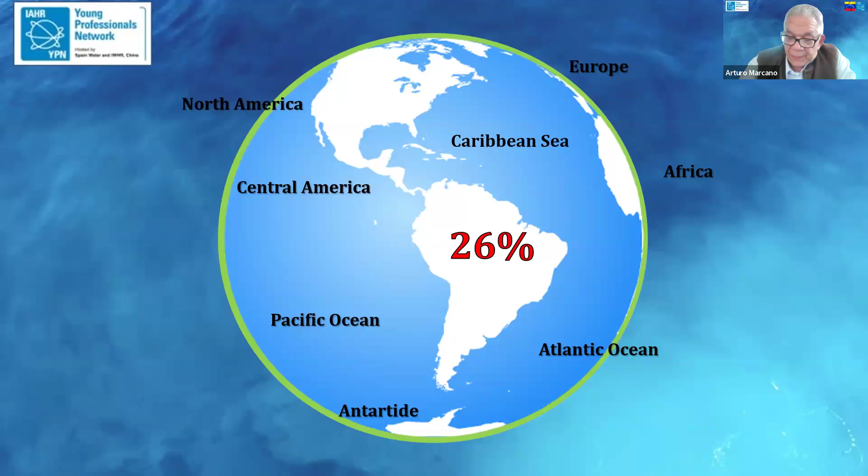So I'll start. This is mostly well known for most of you. We have 26% of the water of the whole planet concentrated in South America. This is a continent of water. It's water everywhere, although there are very few spaces where no rain at all falls. This is in the Andes, very close to Chile. Here we can see all these large rivers I have collected from some data. Many of you will be familiar with some of them because of your location.

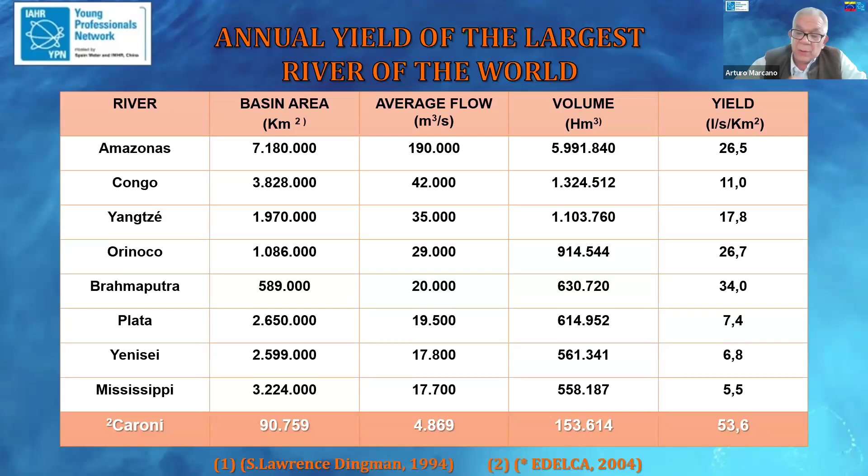We can see that, for instance, the Orinoco River is in Venezuela, and it's probably one of the best producers of water. I have included here the Caroni River, which is not in the same ranking as these large river basins, but you can see also a very large production of water from this river basin.

So why is Orinoco on display? Well, this is because it is controlling water in the downstream dam, at the end of the cascade. It is going to control water there. It's going to control the performance of the structure.

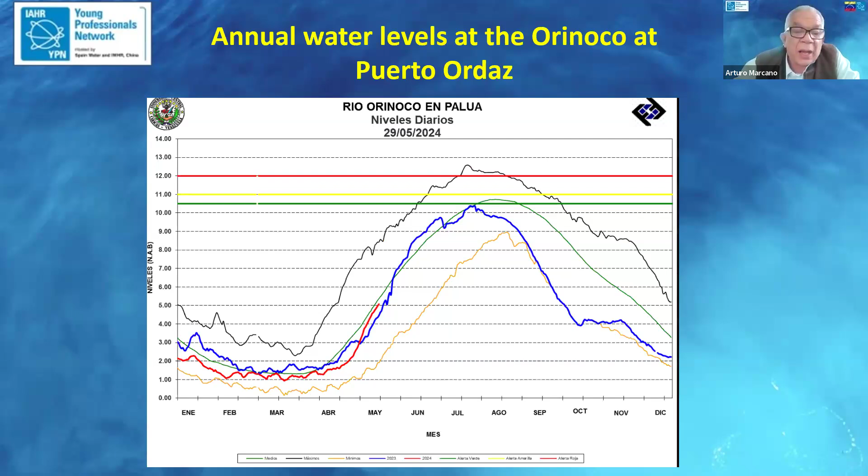So it's very important because downstream, at the very end, on the Orinoco, is the city of Ciudad Guayana. This is a city of 1 million inhabitants, with some of them at risk in the floodplain of the Orinoco and Caroni rivers. This is very short about hydropower in Venezuela.

We have only 9 hydropower stations. We have 5 in the Andean regions, and then we have 4 in the Caroni River, in the southeast of Venezuela. It's a small country, but it has a lot of hydro production. In this case, about 80% of the whole country's electricity depends on the Caroni River basin.

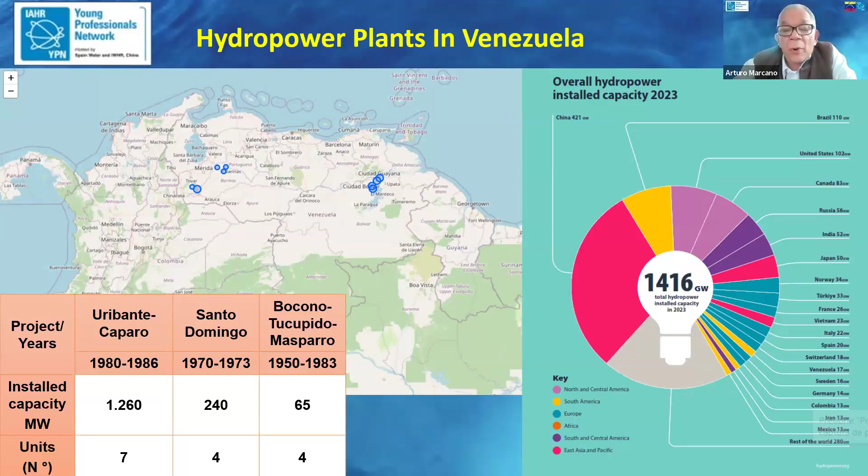We see the 4 in the upper Caroni for the future. Here is the cascade of the lower Caroni, starting with the regulation dam of Guri, 170 meters, and this is a very large volume. It's multi-annual regulation, and it finishes with Macagua. This is a small development, but still most of them are very productive in energy.

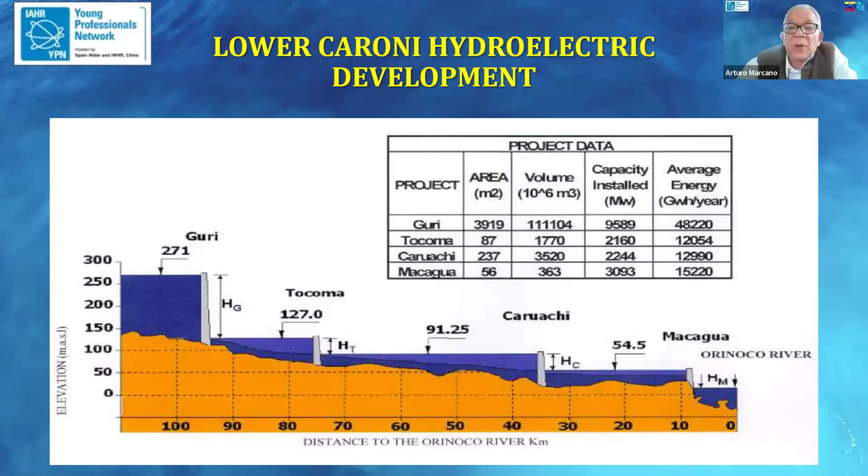Here we can visualize some of the challenges of building all these developments while the others are operating, and also having flood control in one or the other. So how to control the Orinoco River, not to affect flooding from releases from Macagua, etc. So we can start to visualize the challenges of this development.

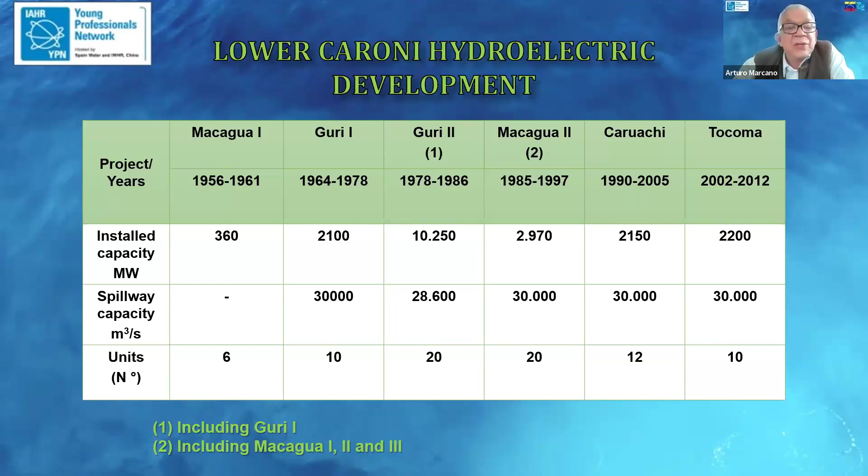So we start with the first project, that was Guri the first. These are the challenges for this. Well, flow is always a challenge: 40,000 cubic meters per second spillway design, diversion 17,000 cubic meters per second, the Caroni uncontrolled, a relatively small reservoir area, and, very interesting, we had unprecedented hydraulic conditions for a sluice closure. We had a sluice closure in most of these dams, so we're going to see that in some detail.

Handling a spillway flow with a very large flow capacity, talking about 40,000 cubic meters per second. This is about energy dissipation, and this had to be seen with a reduced capacity of regulation. Not only do we have these flows, but we have the spillway operating for 6 months, 8 months, a year, because the dam was not completed and the flow regulation was not 100%.

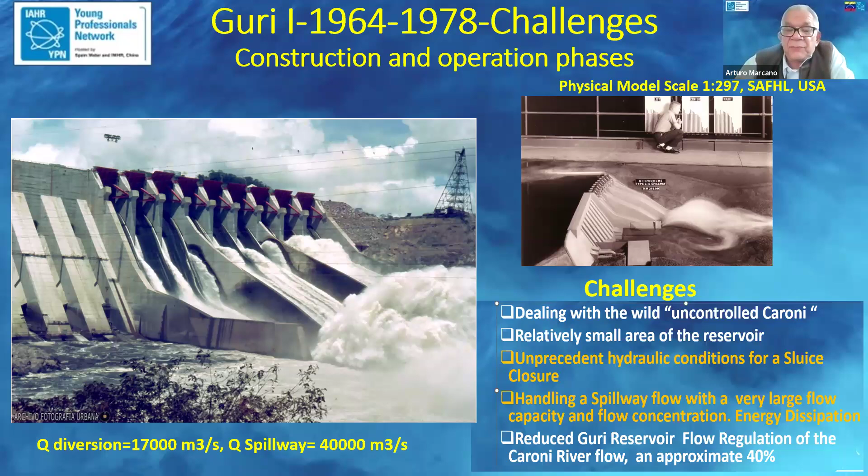Next project is Guri, the final stage. That means building one dam on top of the existing one from stage one. So the challenge is the second powerhouse; the tailrace channel is being excavated. And what is the meaning of raising the spillway and the existing dam by 55 meters? So in this, we incorporated all kinds of problems we had in Guri one. We tried to solve them and include them in the second stage. So we're going to see some of these challenges and how we solved them in a few minutes.

So we also had to guarantee operation of this dam while we started to build other developments downstream. To give you some degree of the challenge, we raised the spillway in different stages, and at the same time we had to keep enough capacity in the structure. So concrete was being poured on one side with gates, and the other part of the spillway was at another level with gates. So river floods would come and had to be released from the reservoir.

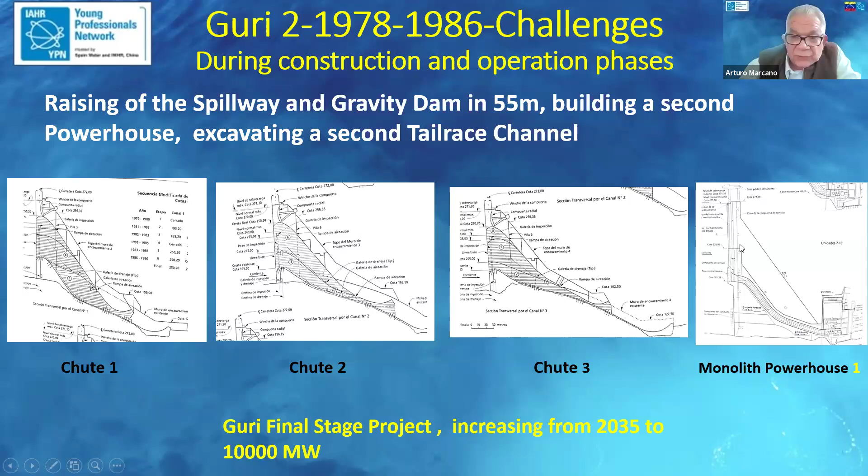Here you also see the dam being built up 55 meters. So we just passed that. This is how it looks now. It's something a friend of mine sent me. This is an advertisement from Water Power and Dam Construction. I don't know the date, but it has very interesting data. And it says at the end that Guri was for many years the largest hydropower station on the planet.

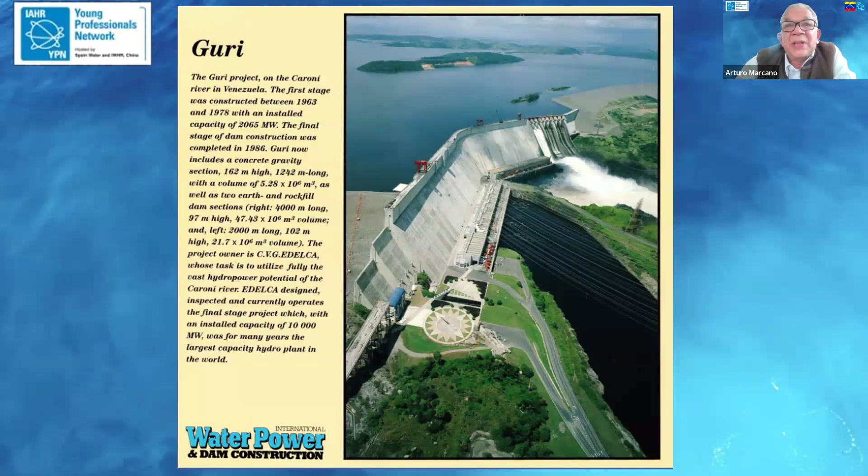So let's go to the second project. This is further downstream. It's called Macagua. Macagua is about 2,300 megawatts. One challenge is it's inside a city, so it's an urban project. And the other challenge is it's in a very touristic area where a very well-known park is. There are a lot of elements of ecology in this project.

Also, being the last project, very close to the Orinoco River, there was some risk and some challenges that may arise from controlling all the water outflow in Macagua. So, same thing, we have construction in one dam.

We have to close the full river, Caroni River, downstream, but we should keep Guri operating as it was for the energy supply of the country.

Next project is Caruachi. Caruachi is in the middle of the two. But what are the challenges? Well, at Caruachi we had to design a spillway, a very particular one, to improve diversion difficulty. So it was a very nice opportunity to test some breast spillways, surface spillway. So we finished up with the spillway work. I'll relate some studies in a few minutes.

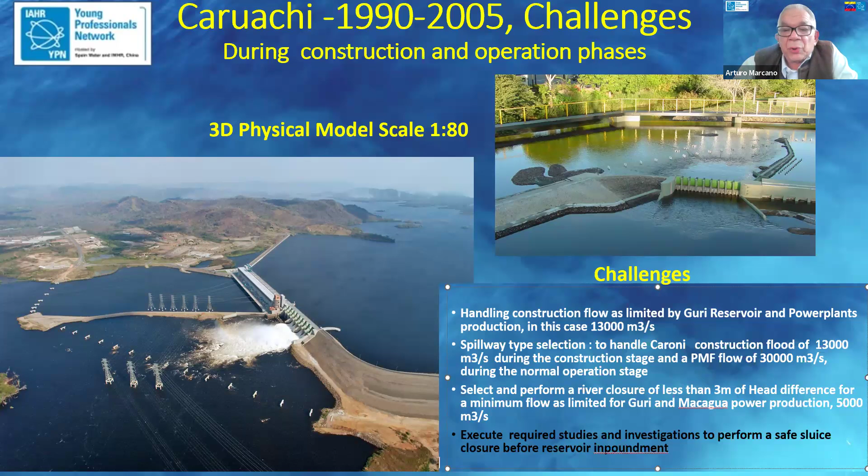So again, we had to have also a river closure in the sluices, with not much difficulty. So again, Caruachi is in the middle of the two projects. So handling flow from Guri and retaining in Caruachi, releasing in Caruachi or to Macagua, which also may impact the production. So these are the challenges.

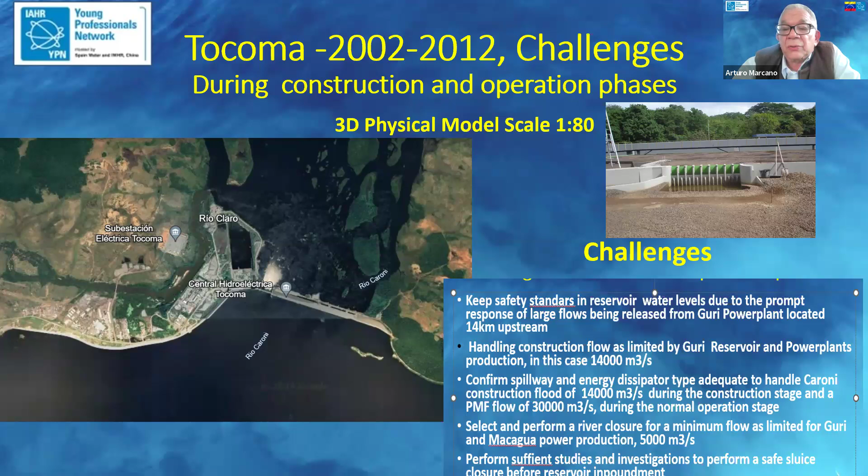Finally, this is the closest to Guri. It's very close. Actually, you step on Guri Dam and you see the other dam is only 14 kilometers downstream. And challenges are related to safety. Of course, when opening the gates at Guri, gates in Tocoma project should be also open, etc. So again, we have to confirm all studies, investigation for sluice closure, and also how to deal with the 14,000 cubic meters per second construction flood.

So this company, EDELCA, who was in charge of this development, also had a program, a master plan, and decided to have its own laboratory to participate in all this study. So we had our first test in 1977. I had the opportunity to participate as a very young engineer, just graduated from university. I started that experience, and that continued. And the laboratory, although it's somehow inactive now, went on for more than 35 years.

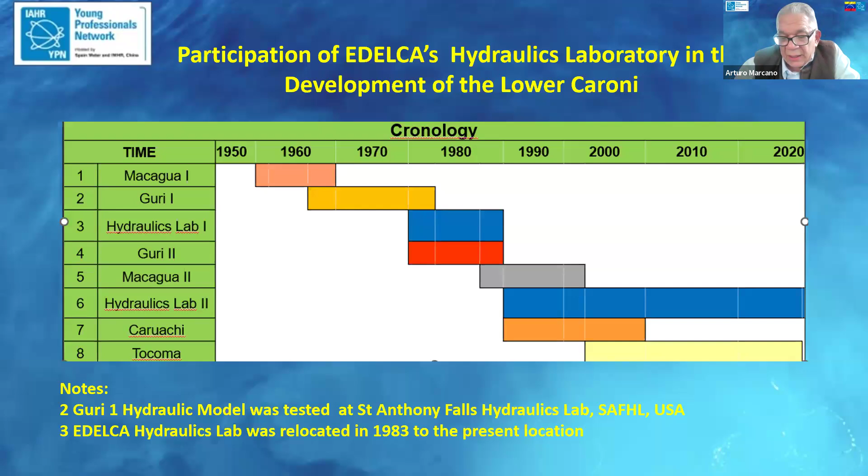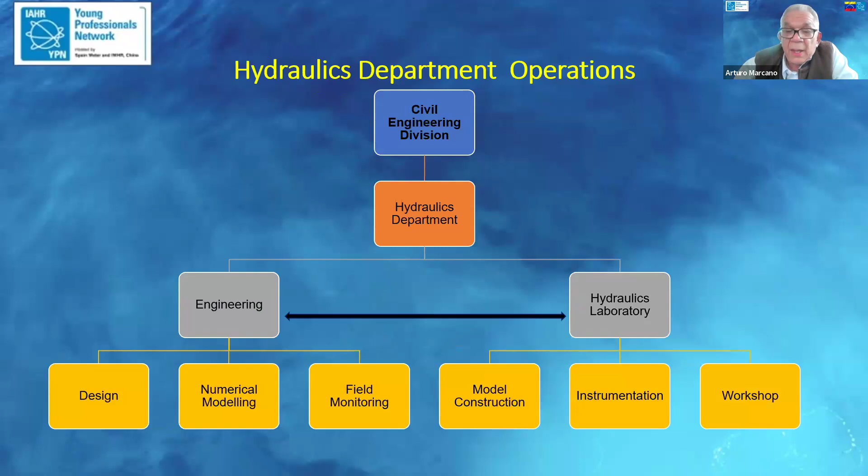So I had the opportunity to test, study and design most of the hydraulic structures related to this project. This is the strategic location of the hydraulics department where the laboratory was. This is more or less how the hydraulics engineering department worked, with the design, the numerical modeling, the field monitoring, model construction, instrumentation, and at the end, the workshop.

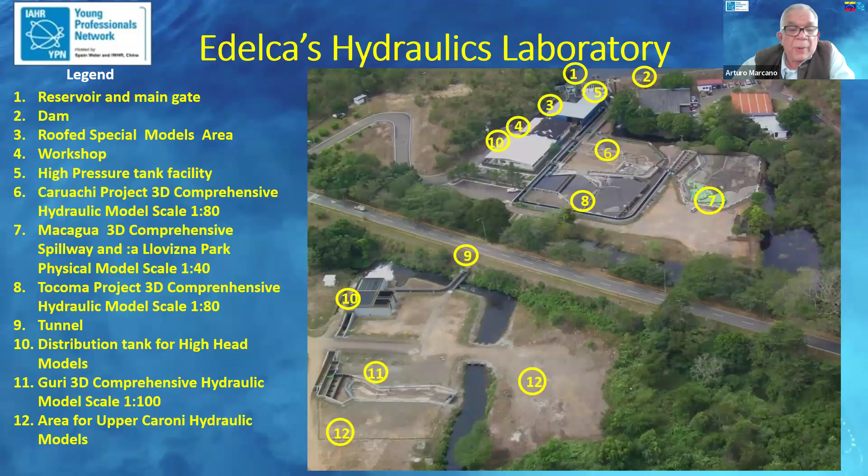So this is the first site of our laboratory. We see the large models. All the models of the development were there. Most of these large models are over 1,000 square meters. We have a facility to test tunnels. We have, of course, a workshop and instrumentation room, and some area for expansion for future projects.

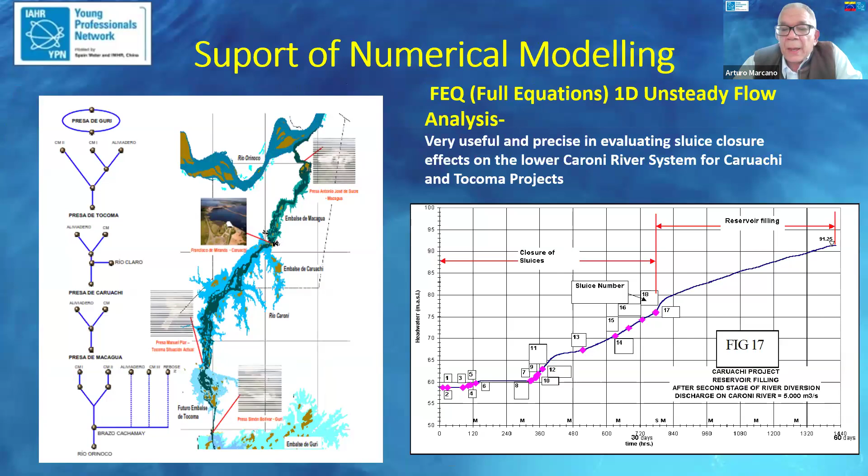So talking about numerical support, we use very well-known and common software like HEC-RAS. We managed to measure in a whole 100 kilometer reach a lot of flows and water levels and so on. So we could see that this model worked perfectly, and our forecasts ran very well. We also use unsteady flow, particularly for some situations. For instance, in the Caroni, we have all this sluice closure, and that model performed very well.

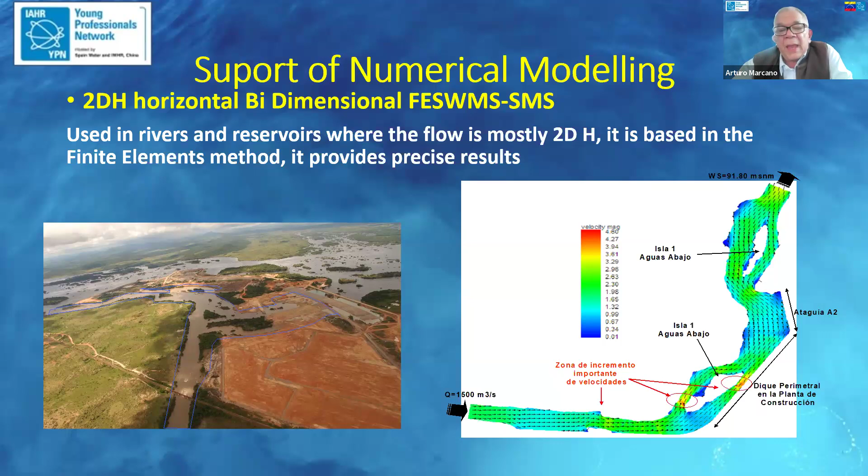Also, dam break we use to do inundation maps. We have this 2D horizontal SMS flow. It is very nice also. In our laboratory, we have the opportunity of mixing them and checking one with the other. So that's the kind of thing you can do when you own your own laboratory and your own people to design a project. We were a team that stayed there for many years. So all these models, although they may look very simple, were very useful.

This is another model we used one time. We were dealing with aeration at Guri with this model, since a finite element model was perfect for the job we were doing at the moment. And we managed to combine this with the prototype and physical model data to obtain our best results.

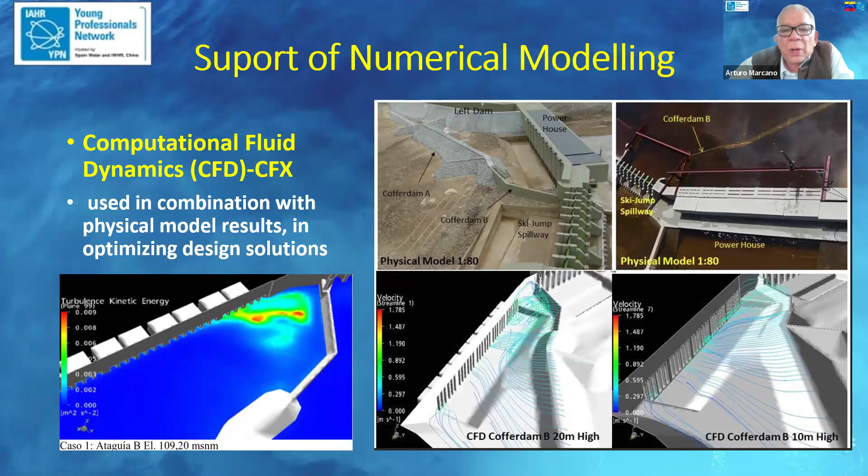Then also CFD, which is very common now. Those were studies of 10 to 20 years ago. But it's very interesting. We mixed numerical with the physical 3D model. So it was a very nice combination to optimize your project. Here's a presentation of what kind of models we used for Caruachi. We have all sorts of models we can use to solve the different problems we had on that project.

Let's talk about some incidents. The sluice closure. This is Guri. That happened many years ago, but it was a very well-known case. We had gates get stuck and the river could not be stopped passing through 14 sluices.

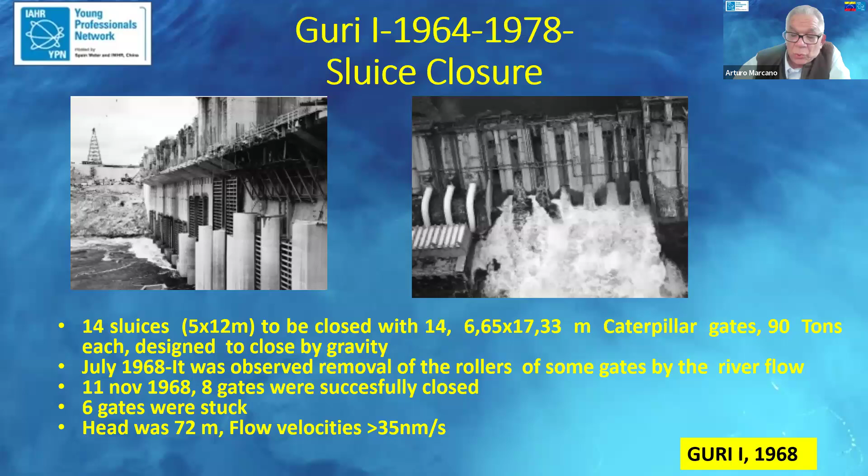It was designed for 17,000 cubic meters per second. So what happened there? They didn't test gates. They didn't do it; they thought they didn't need to do it. The design was not very friendly either to close with some additional things. There was no second slot. That means no emergency closure.

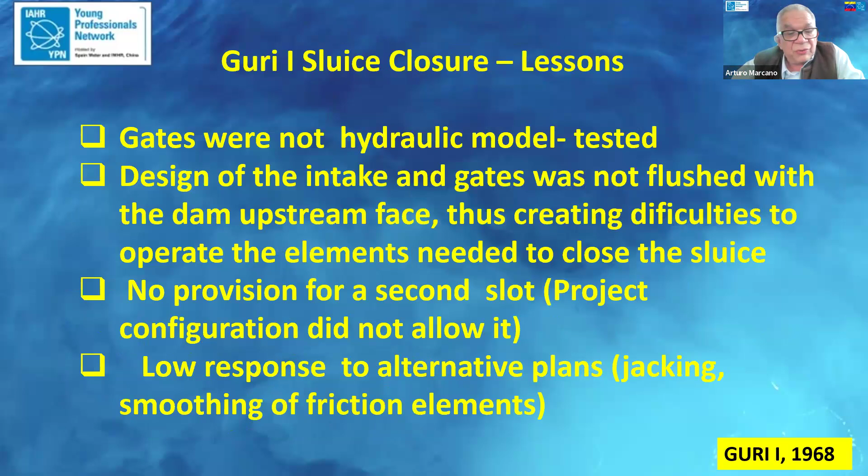This is what I'll mention to you later. It's very interesting. Then they did many things, but none of them worked. So they finished up with this kind of arrangement. They were dropping heavy things until those were placed in front of the sluices. They were closing one by one. And it was a nasty situation. It lasted for some time, but they managed to finish.

Somehow that lesson was in our minds, although we were not at that time in the place. Let's see how we saw this in Caruachi. So in Caruachi, we had the laboratory. We have people there, we have engineers. We could analyze first the kind of spillway. We needed to have 13,000 cubic meters per second diversion and 30,000 cubic meters per second as a service spillway. So we managed to finish with this structure, which has been built now and is operating.

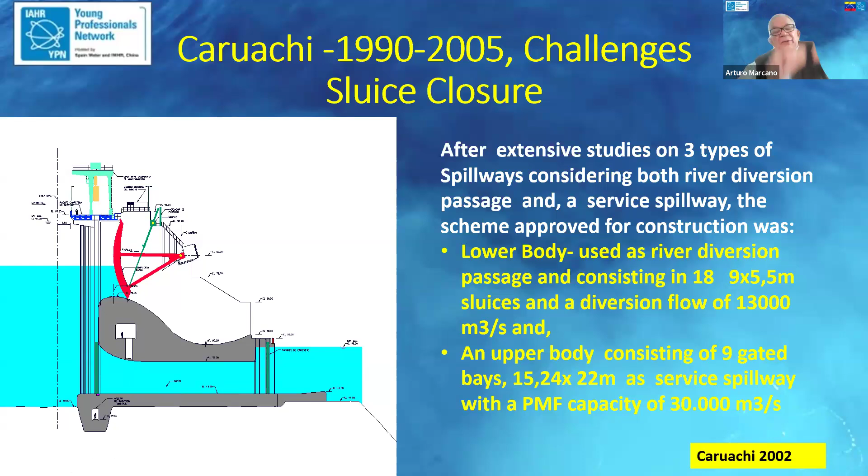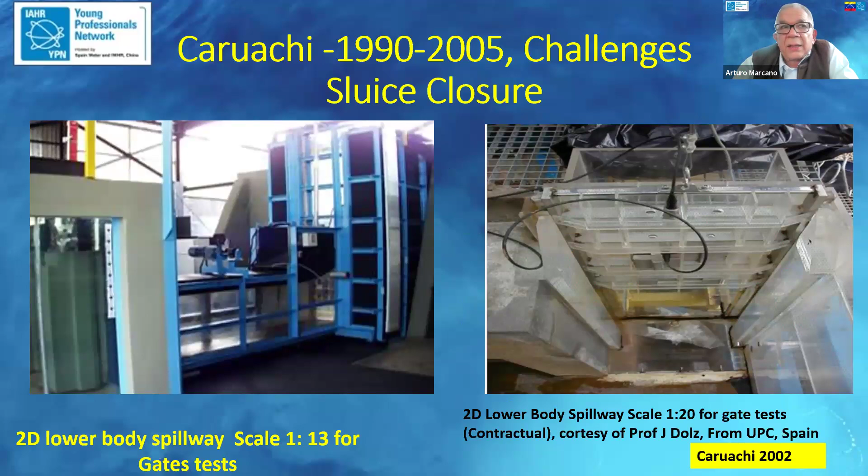We had two slots. We have the possibility to have a service closure downstream, and we have the possibility to have an emergency closure. So it was 18 sluices, 9 times 5.5 meters. But we implemented some modeling of gates. We had our own model, and the contractor contractually had the obligation of doing another model.

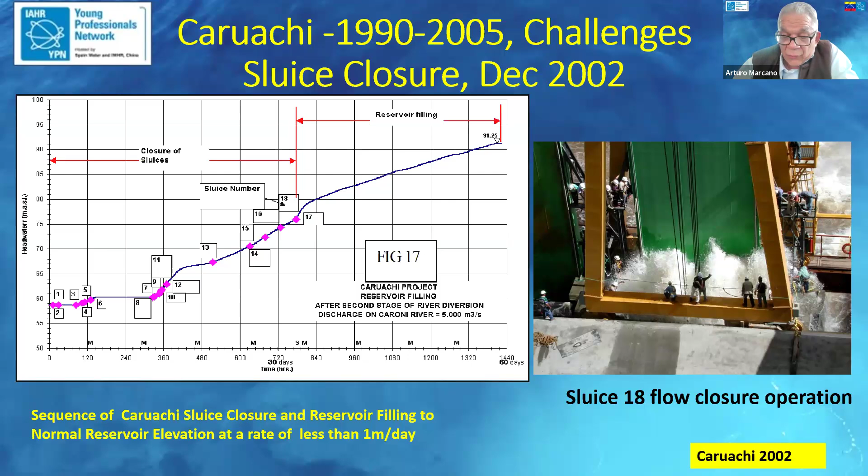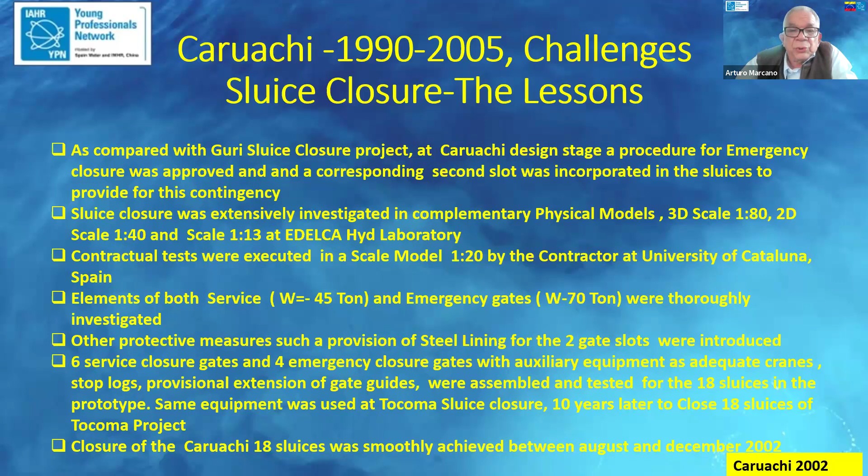Then the lessons. We learned that investigation should be done, that provision should be taken for a second slot when you have this kind of situation at the river, other protective measures or provisions, steel lining, etc. So we feel that was also a very good idea. We had the laboratory, we had the people there, we had the intention of not repeating the same failure. And actually, we used the same equipment to close, 10 years after, the sluices of the Tocoma project with no problem at all.

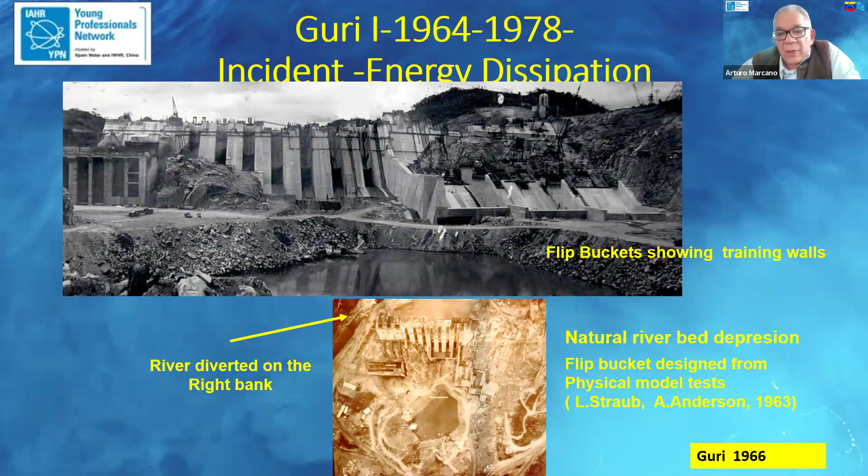So we go to another incident. It's also Guri. Everything comes from Guri. It was so monumental, such daring work. It was a time when things had to be done that way. So we have these flip buckets there, and we have the sluices. So we started having this kind of behavior of the flip buckets. They behaved terribly badly. We had a lot of problems repairing them with this floating gate. You can imagine all kinds of problems, because the flood had to be released through the next gates while you were doing the protection.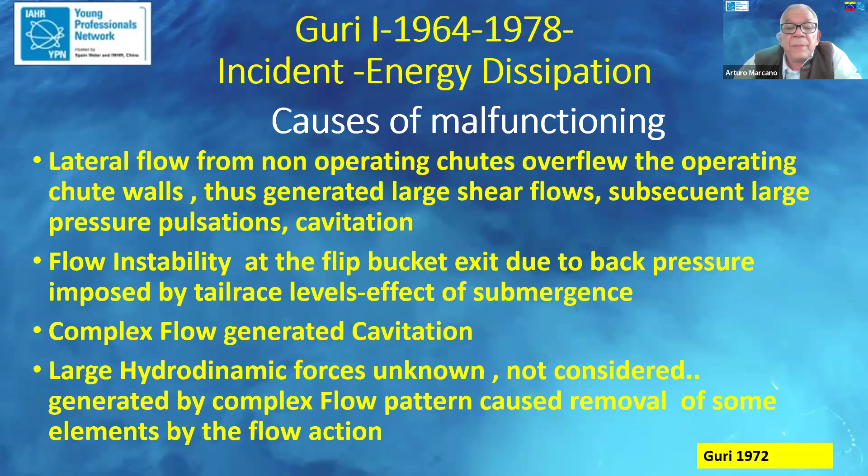So what was the cause of this? We have very large structures working with submergence, a very complex flow in this interface of submergence and flipping. That was investigated in the large model in the San Antonio Falls Hydraulic Laboratory. And a decision was then taken by the company to raise this flip bucket. So we went again to physical modeling, and we finished up raising these three buckets. We did quite a lot of tests. It was one of my tasks; we tested so many flip buckets, and we finished up with a range that was pretty good.

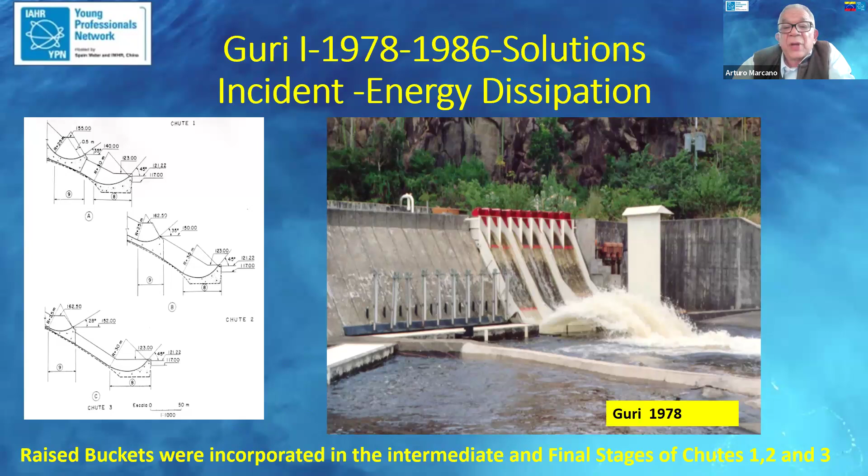So the lessons, I mentioned some of them. These are very large prototypes. We don't know much about how they're going to perform, and we should take the risk. And eventually, if we had a chance to improve, repair, or do rehabilitation as we did, that was something very important to consider.

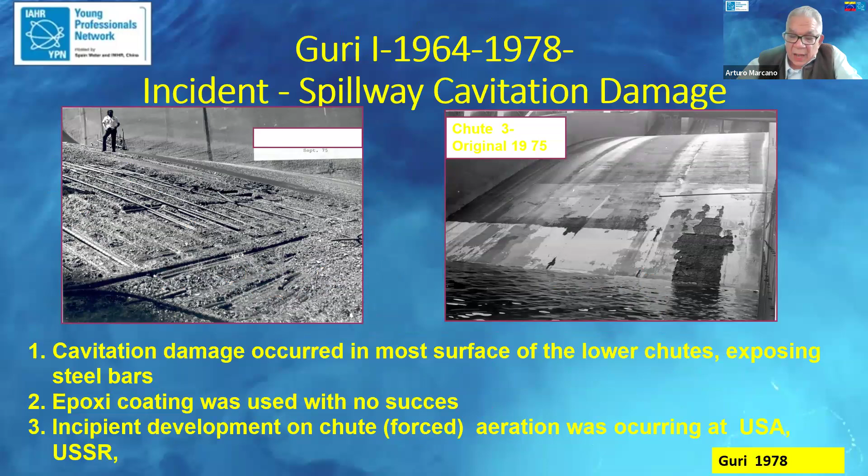The second incident is about cavitation. It also comes from Guri. And we have many other lessons, other cases in other projects, but I think these are very prominent. There was a lot of cavitation in the first structure. At that time, in many large surface spillways, the technique of aeration was being introduced. So what did we do in Guri?

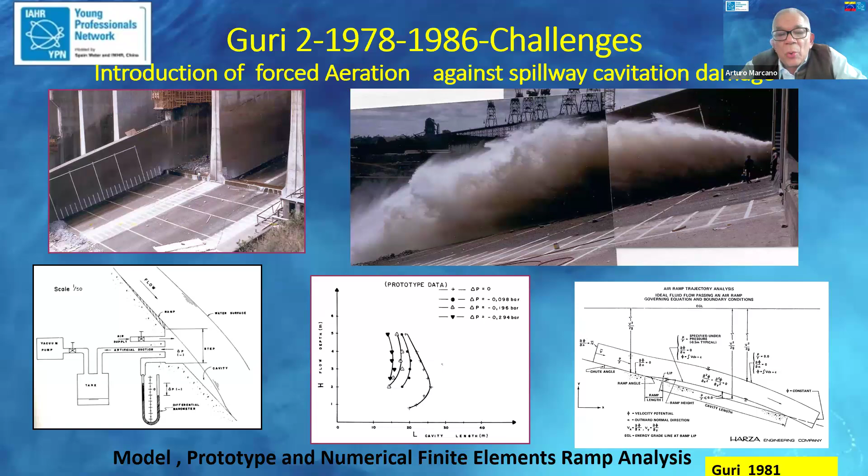We started to test how these devices will perform. We had the prototype, then we have a large physical model. We count also with numerical tools. So we started to do testing in the prototype measurements, and we finished with this kind of arrangement, which is very unique and strange. It can be used, of course, in other projects, but it's an aeration system that you build when you have a project already built, say, put it in that way.

So the best possibility was to adapt a system of air galleries, as you see there, with some intake somewhere close, and then a manifold of air. So we had the chance of measuring all that. We measured negative pressure, we measured flow, velocity, and we managed to develop a method. So at the end, we finished with a couple of aerators in each chute, we have a gallery in the downstream aerator, and we have a ramp at the end of the pier. So they will perform very well.

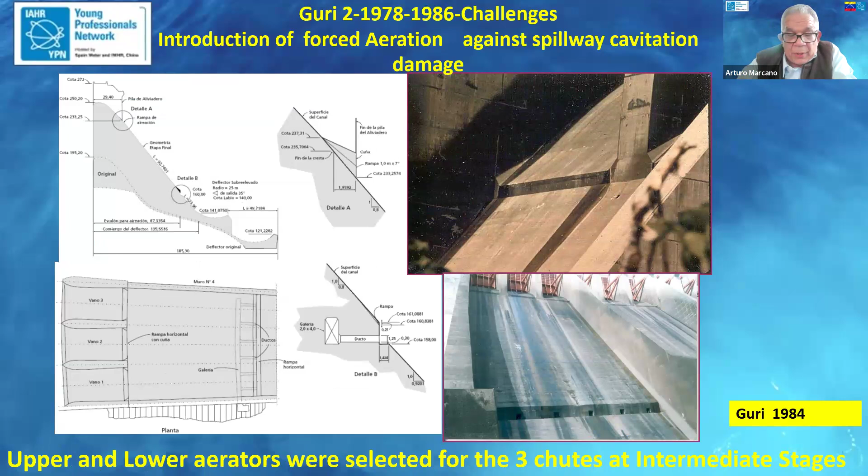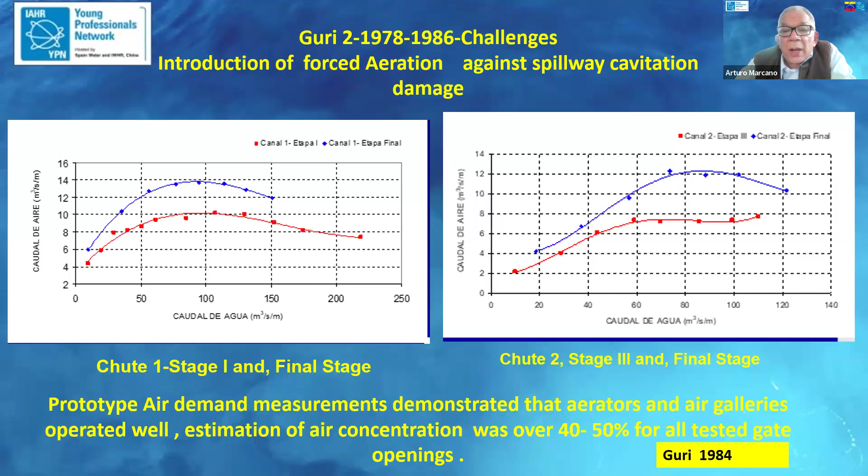For instance, these 2 graphics come from prototype measurements, and from that we can estimate air concentration of about 50%, which is what we asked in the design to protect the spillway surface. So I think we're running out of time, so I have more topics, but I will finish my talk with some final remarks.

There is some confidence created by having this laboratory performing, well equipped, and very motivated with this project. The laboratory actually was next to the works. We could go to any of these works in less than 1 hour. We could move there and see the structure performing. We could go for meetings there. We could inspect the job done by contractors. So in that environment of total control of what was going on, we were always also part of the design team, as I mentioned earlier. So this is a key for success.

I think we didn't lose respect for such a large river. We had a lot of surprises from it, but we were capable of handling them, of facing them, always with the help of our mentors, of more experienced engineers, more experienced experts that were always around us. So I think that's my last word.

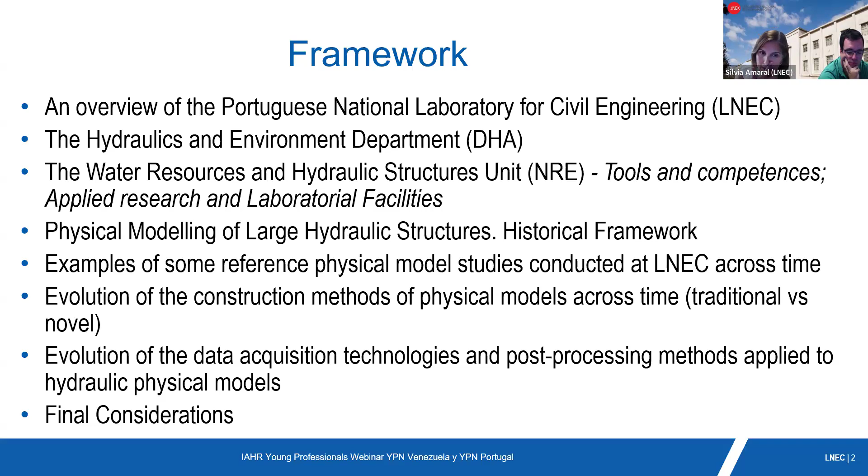So then I will offer a historical framework or background of what is and what has been the physical modeling of hydraulic structures, as well as some examples of reference studies performed here at LNEC across time. Also, a view on the evolution, not only in the construction methods, but also in what concerns the data acquisition technologies, as well as the novel post-processing methods that are currently being applied, will be presented, as well as some final considerations at the end.

So, for a start, LNEC, the National Laboratory for Civil Engineering, is a state laboratory that dates from 1946, meaning that it has almost 80 years. It actually started with the hydraulics department, with the physical modeling subject. It operates in several fields of activity, its main fields being the civil engineering works directly applied to public works, since it is a state laboratory, housing and urban planning, also the environmental concerns, the building industry, and last, the components and other construction products.

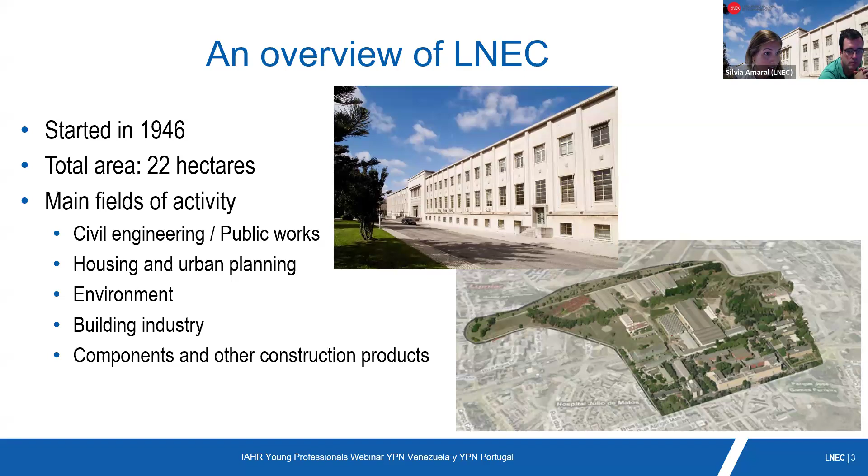So our department, the Hydraulics and Environment Department, has a wide scope. We are only a unit of this department, but in general we can say we are divided in these 5 areas: the urban waters, more currently called sanitary engineering, the estuary and coastal zones, the harbors and maritime structures, the water resources and hydraulic structures, and the groundwater. These physical model studies applied to hydraulic structures are performed mainly in the water resources and hydraulic structures unit.

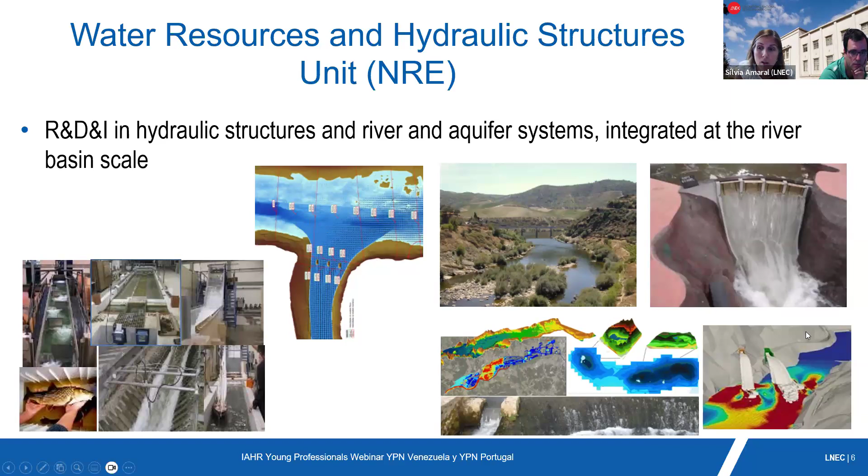This unit is where António and I are from, and we perform many types of studies, among which research and development studies, applied investigation studies, but also consultative projects that are meant to give direct answers to specific projects, mainly in hydraulic structures, in rivers, aquifer systems, all integrated at the river basin scale. So here in this slide, some examples of our facilities, of our flood studies, of our physical models, as well as of our numerical simulations.

So, in terms of our competencies or our tools, we act at 4 different fronts: a laboratory front, a field front, a computational front, and a decision support front. So in what concerns the laboratory front, we have our scale models, which are mostly physical models that can be divided in 2 different activities. Physical models applied to give answers to certain specific projects, mainly ones being constructed or that have to be improved, for example, power plants that are performing some power reinforcement. This is just an example.

And also the specific investigation studies that most of the time give origin to PhD studies, or lines of research that we have open and that are of absolute interest here at LNEC. Then we have the field monitoring. It is composed of field campaigns and sensor installation at the prototype scale that are monitored, and where we gather data sometimes to compare to our physical model data, but not only.

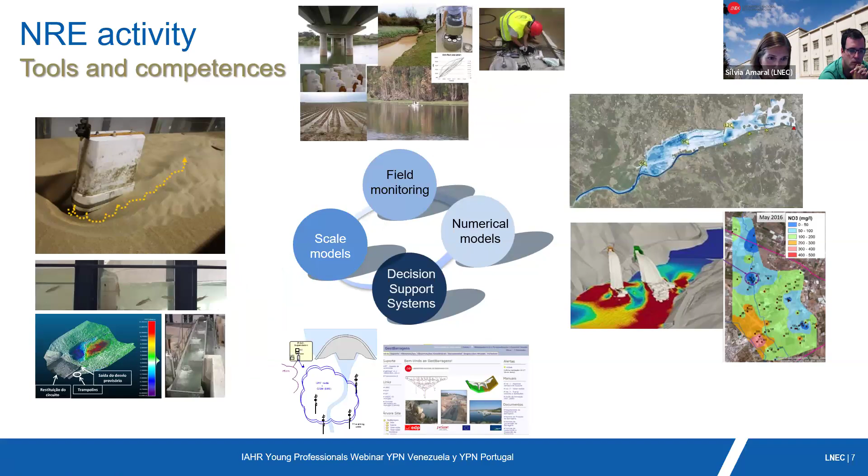Then we have these decision support systems, which are mostly platforms that were created where we give information to support the decisions. So, some examples of our facilities and of the flood propagation studies.

So regarding the NRE as a whole, I can state that currently the advances we have nowadays in what concerns the construction of scale models, namely by using these novel approaches of 3D printing, the control of equipment automatically by computing, even the new materials that we are able to use, combined with the integrated modeling of complex geometries of hydraulic structures, not only with physical modeling, but also with CFD simulations, allow us to affirm that we are currently at a stage of strong improvement on the characterization of flow behavior around hydraulic structures.

That is to say, not only, but also spillways, hydraulic circuits, and other specific hydraulic structures. I think I should make a remark here that we mostly refer to the spillways and hydraulic circuits because plenty of our consultancy work is concerned with dams, with the hydroelectric power plants that are already built and being improved, or that are about to be built. That's why this is a huge part of our work here at NRE. So I can say that NRE, from this point of view, performs an important activity at the national and

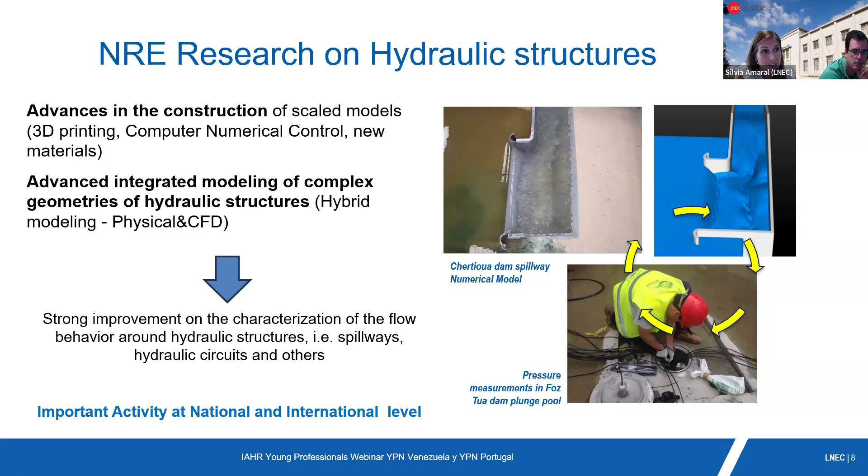international level. So you have here the example of a physical model, on the right side, a numerical model, and below you have also the sensorization, the sensors installation at a prototype scale. Of course, this is not always possible, but in some models that we have accompanied from the start, during the construction of the dam that follows the physical model and the numerical model, we were able to install some sensors in order to compare with our results.

So in terms of lab facilities, there are plenty here, not only in NRE, but in DHA, in the hydraulics department as a whole. We have a 5,000 square meters indoor area with a pumping capacity of 500 liters per second. So we count with an artificial aquifer where we are able to perform pollutant tests for groundwaters, with a channel that allows us to perform reservoir sedimentation by studying the turbidity currents, a facility where we study the jets impacts on a plate or a stilling basin, which is actually the field of the PhD of Antonio, which is about to finish.

We have also a non-conventional spillways facility where we study precisely the aeration issues, stilling basins. We also perform at a scale of embankments, like the failure of embankments, in this case river dikes or even embankment dams, fish ladders, flumes with variable inclinations, where we are able to study the scouring around bridge piers, steep spillways where the aeration is also an issue, water quality and soil laboratories, as well as the study of floods in compound channels. Of course, these are not all our facilities, but it gives a good idea of the kind of works we perform here in terms of physical modeling.

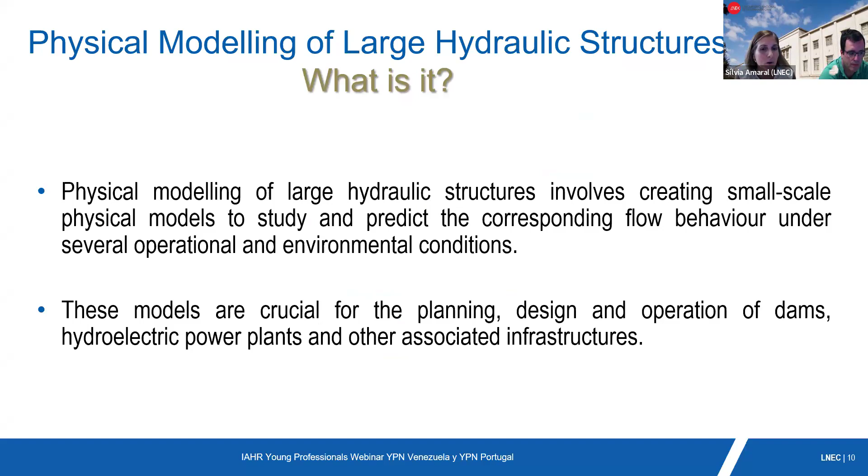So, generally speaking, what is this physical modeling? This involves creating small-scale physical models to study and predict the corresponding flow behavior under several operational and environmental conditions. And of course, these physical models are absolutely crucial for the planning, design, and operation of dams, in our case, which is most of our work, hydroelectric power plants, and also associated infrastructures. From the role of these studies point of view, we can say that physical modeling is very, very important for the design and planning of a project.

I mean, the validation and optimization of the design of the dam that was initially thought and dimensioned based on the theory. It is also essential for the hydraulic analysis in terms of how the flow behaves near the hydraulic structures. Also fundamental for the safety and reliability of the project, since the physical modeling allows to identify potential structural or functional failures, and also to perform the studies of erosion downstream of dams in rivers. It also allows for mitigating the environmental impacts, as it aids in identifying any negative environmental impacts.

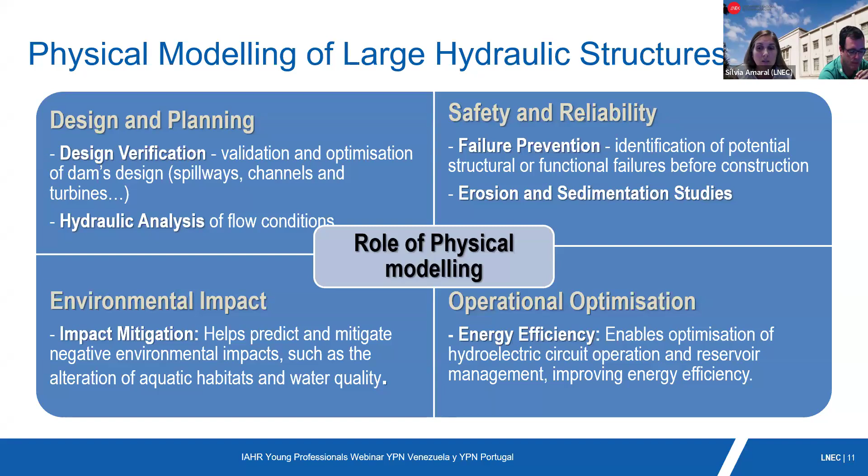This is particularly true when we talk about fish ladders, for instance, where we can try to understand which alteration will be implemented on the aquatic habitats and water quality. As a whole, we can say that the physical model acts as a whole operational optimization, since it enables to optimize the hydraulic circuits as a whole and the reservoir management. So, just some final remarks before I pass the word to Antonio.

I should say that at the beginning of the 20th century, the first physical models or the first studies on these hydraulic structures were mostly based on empirical models, and the reduced scale models that existed, if they existed, were very, very simple, made with very simple materials such as wood and concrete. Later developments, between the 50s and the 70s, some novel technologies started to appear and they started to build models with a higher precision.

These were the decades where the first computing methods started to appear and to give a little help on these studies. But it was only between the 80s and 2000, in what we call the digital age, that some strong improvements started to be seen through the use of computational modeling, starting to give a bit of help to define the physical models. And we started to use some more sophisticated instrumentation, not so sophisticated nowadays, but at that time it was really different.

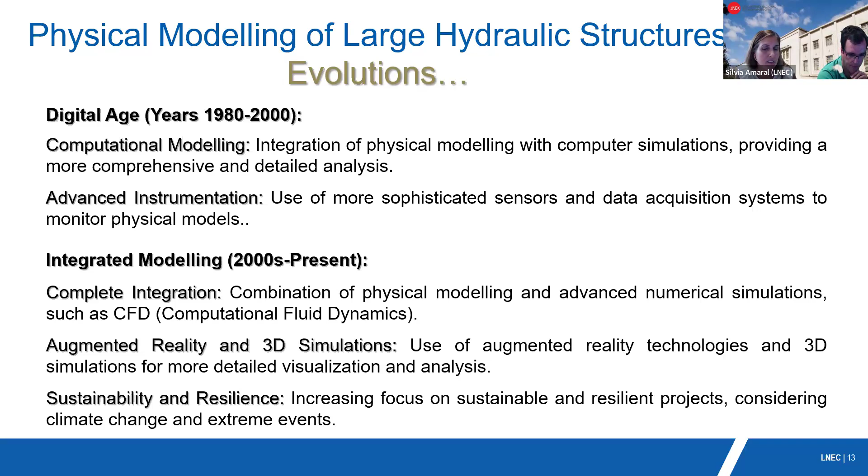And after 2000 up to the present, we are in a scenario of complete integration of the physical modeling with the numerical simulations, most of the time by using computational fluid dynamics, the CFD, also using augmented reality and 3D simulation. Besides this, there has been a strong increase in the focus of these physical models, not only on improving the forms and the design of the structures, but also on creating projects that are sustainable and resilient from the environmental impact point of view, and by adding climate change and extreme events in the simulation.

So now I will pass the word to Antonio.

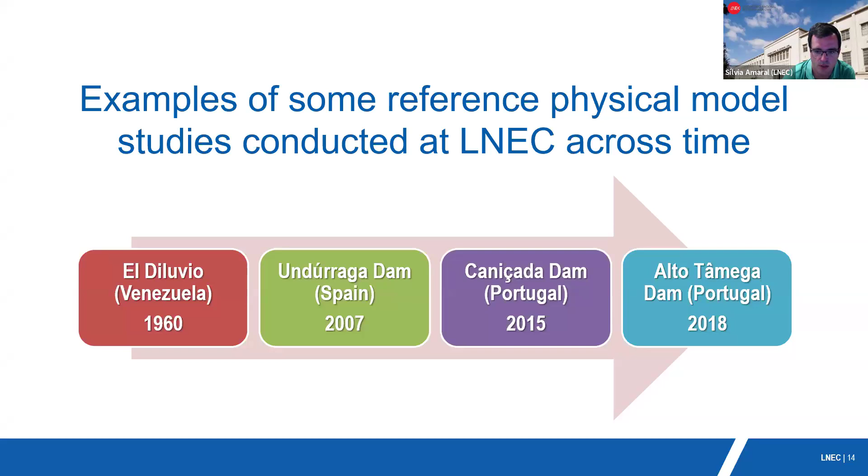Thank you. Now I will present 4 different examples we have here at LNEC, 4 different physical models we built from the past to more or less nowadays. First, only for indication, and because it is from Venezuela, we built in the 60s a physical model of the spillway of El Diluvio Dam in Venezuela. We built 2 physical models, one 2D model of the spillway on a scale of 1 to 100, and the other a normal 3D model on a scale of 1 to 50, with huge dimensions compared to the 2D model.

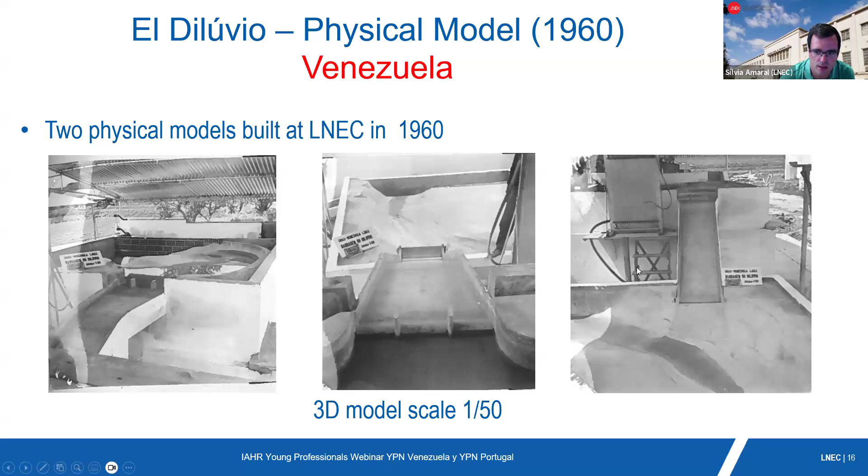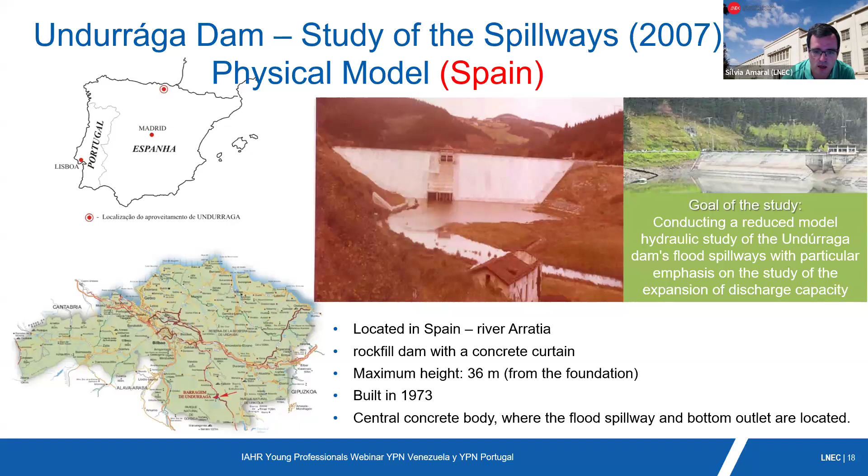Passing to more recent models, here is one from Spain, Undurraga Dam in the north of Spain, and the main objective of the study was to study how it would be possible to increase the capacity of the spillway. Undurraga Dam has one existing spillway at the top of the dam, the main spillway, and another one was projected, the auxiliary spillway. This one is the main objective of this study.

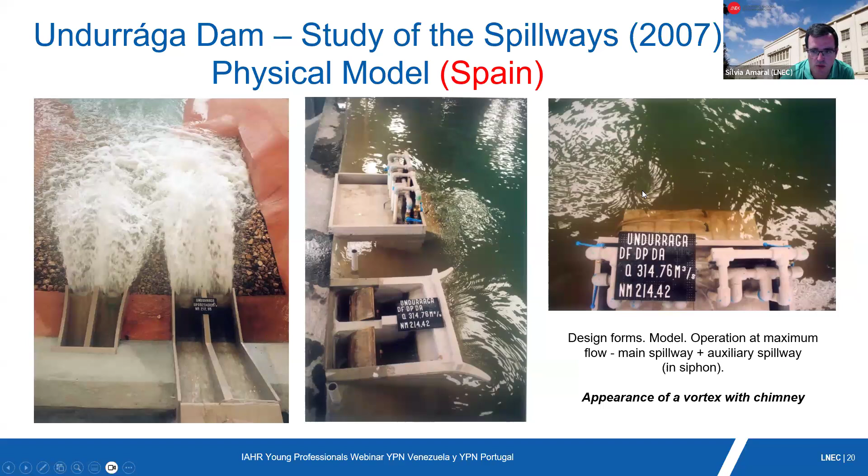We built a 3D physical model, and in these photos it is possible to see a downstream view of the jets created by each of the 2 spillways, with 2 spans each, and the inlet structures of the spillways. In this case, we found some problems, shown in the figure on the right. We found vertical vortices in the inlet structure, causing some problems because the flow inside this spillway is a pressurized flow by a siphon.

And we made some changes in our physical models with the main objective of eliminating these types of structures. We built several alternative solutions in wood at this time, forming a grid, and we found very good results in the flow conditions after the tests. We proposed to our clients some changes in the initial design in order to eliminate the vortex that occurs in the physical models.

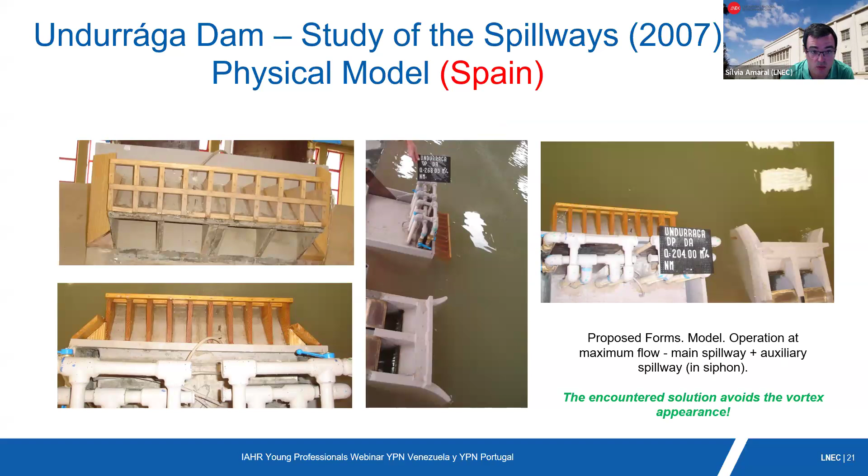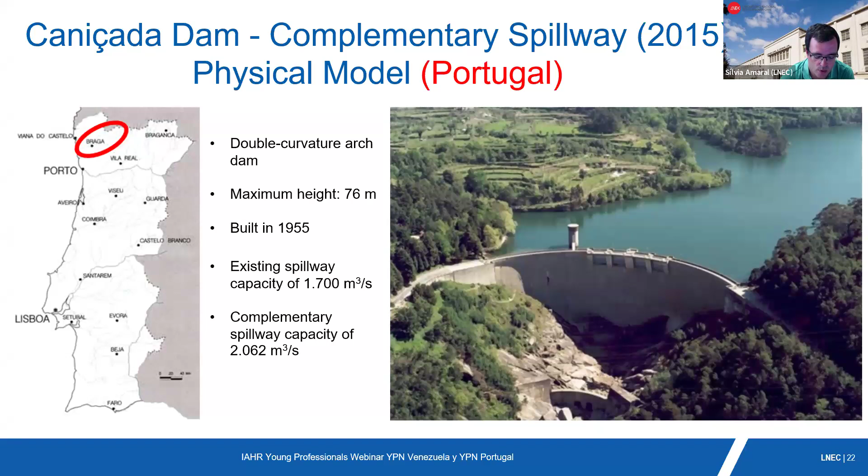Passing to Portugal, Caniçada Dam is a dam built in the 50s in the north of Portugal, with an existing spillway at the top, with a maximum capacity of 1,700 cubic meters per second. Due to the new regulations and the revised climate data, a new complementary spillway was built with almost the same capacity as the existing one.

We built a physical model here comprising the existing spillway, the complementary spillway, the upstream reservoir, and the downstream stretch of the river. I will focus only on the ski jump structures of this complementary spillway. We studied the design shapes, and we found a very compact jet in the figure on the left, which would cause some erosion at the river bank. We studied 8 types of alternatives, like the figure on the right side, with wood simulating different configurations at this time. Nowadays, we don't use wood very often to do things like that.

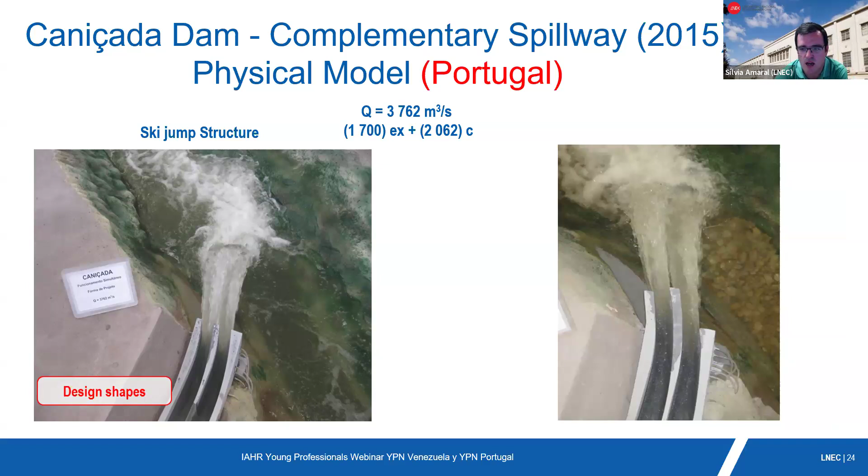After those 8 iterations, we found with our clients a good agreement on the solution for the ski jump structure, and we found less erosion, more dispersed jets in the air, more dissipation of energy in the air and through the atmosphere, and it is better for our clients.

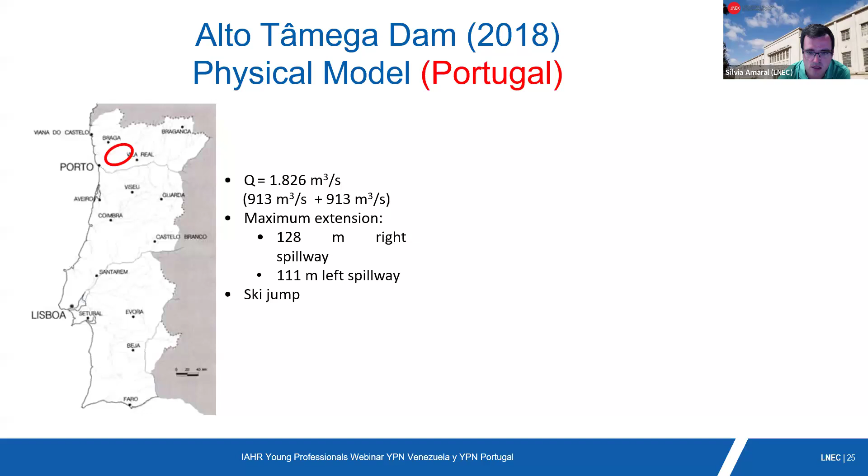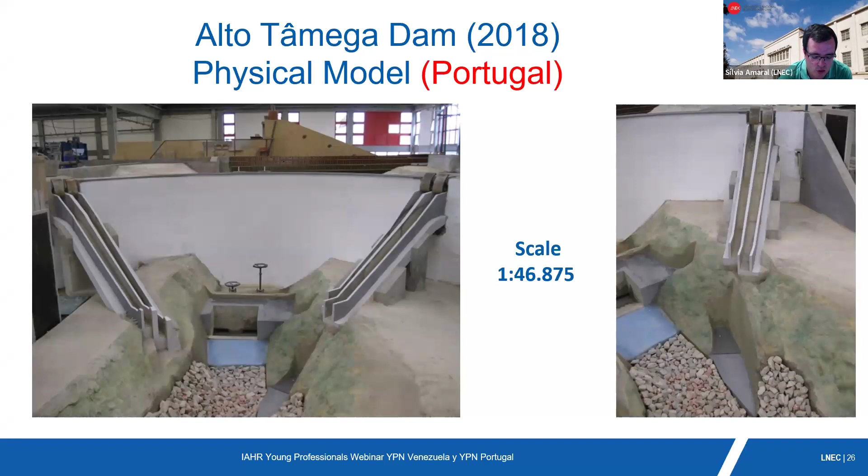Now, Alto Tâmega Dam is, let's say, the last dam we built here in Portugal; it was finished this winter, and it is also in the north part of Portugal. It has 2 spillways, one on each bank of the river, and we built the model at a scale of 1:46. The dam also has a power plant at the bottom of the dam, and likewise we built some part of the reservoir and the river downstream of the spillways in this case.

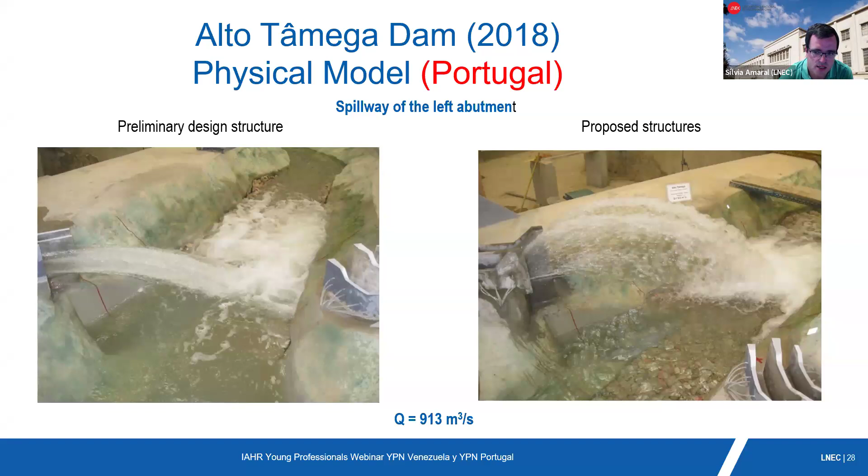For the other spillway, the spillway over the left abutment of the dam, it is more or less the same procedure. We studied the ski jump in the preliminary design shapes. It is a very compact jet impinging at the bottom of the bank of the right spillway, which can cause problems due to scour in these hydraulic structures, and we made some changes, and the proposed structures reveal a more dissipated jet in the air, impinging more at the river center line, and creating less erosion.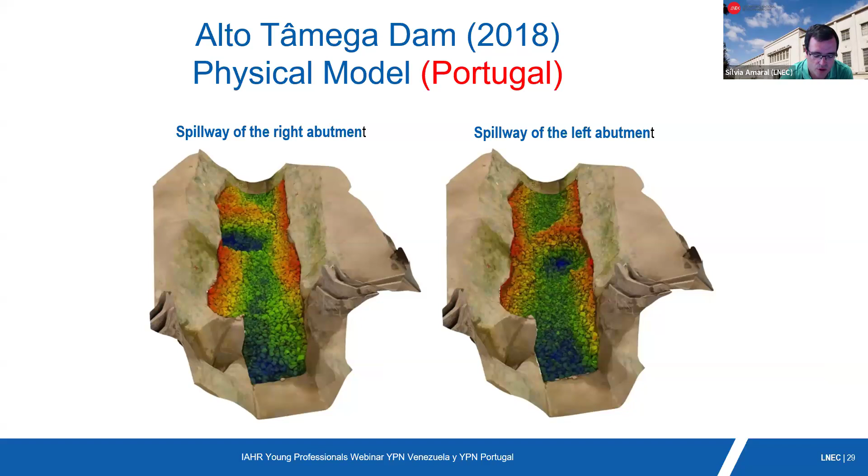In this model, we use photogrammetry to characterize the scour of the jets of the spillways at the bottom of the river. Here are the results of the operation separately from both spillways.

Now we are trying to use novel constructive methods like 3D printing. Here it is possible to see in the left figure one of the spillways of Alto Tâmega Dam, when we started to introduce 3D pieces to modify the ski jump structure, and in the right figure, a 3D piece of an experimental test of a dam failure in one of the flumes we have.

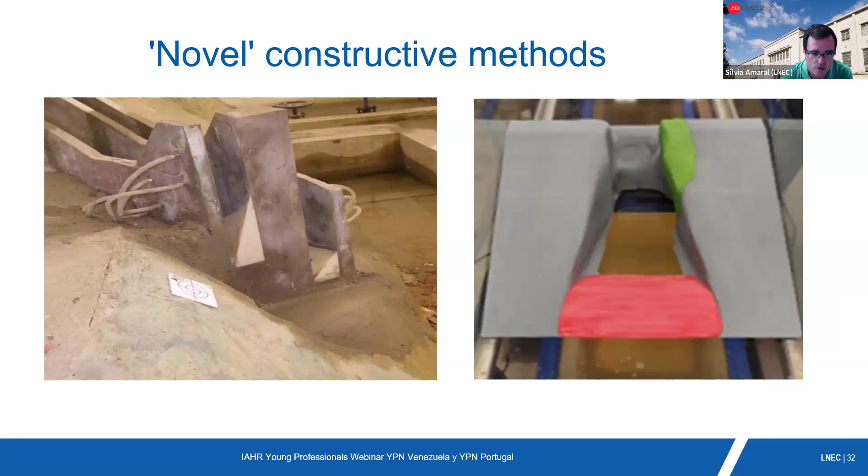Now we have abandoned the old traditional way, and we also started cutting acrylic plates in a computerized automatic machine to build lighter models, clearer to see the water inside, easy to build, easy to destroy, less time consuming, and easy to change if necessary.

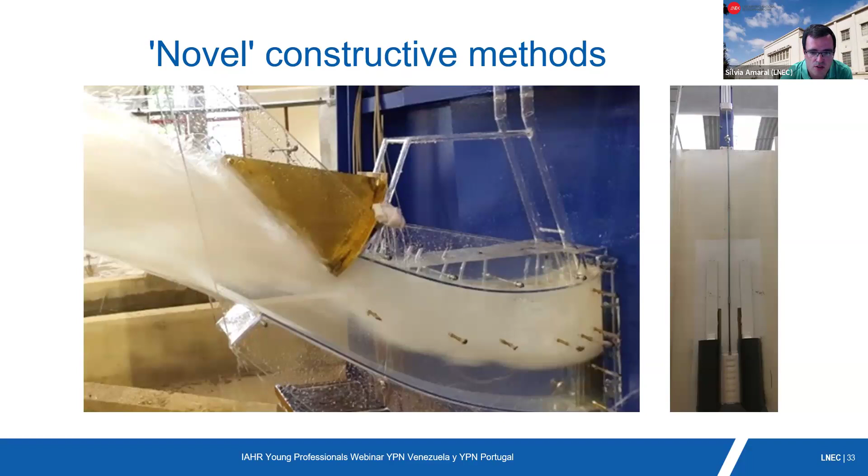Now, in one of the last models we have here, we cut more or less all the pieces of the model in our CNC machine, from PVC plates. We make a big structure to support the model, and it's lighter. It's less time consuming. It's easy to build, easy to demolish after the study is completed, and our clients also have the results faster because it is faster to build.

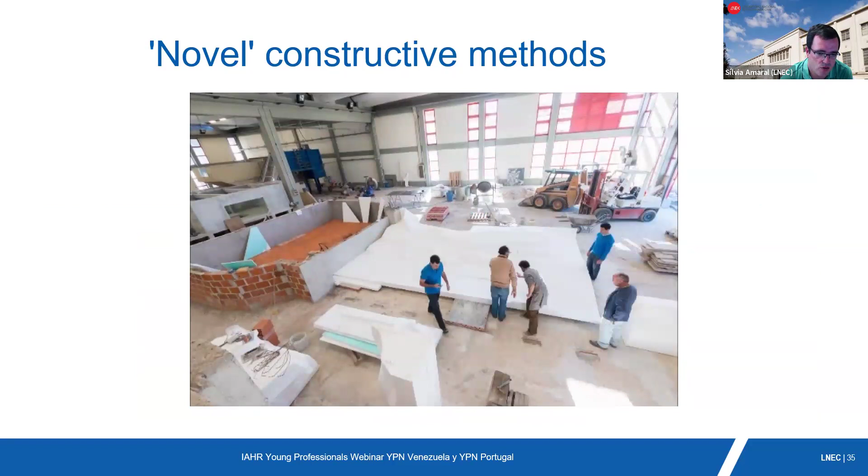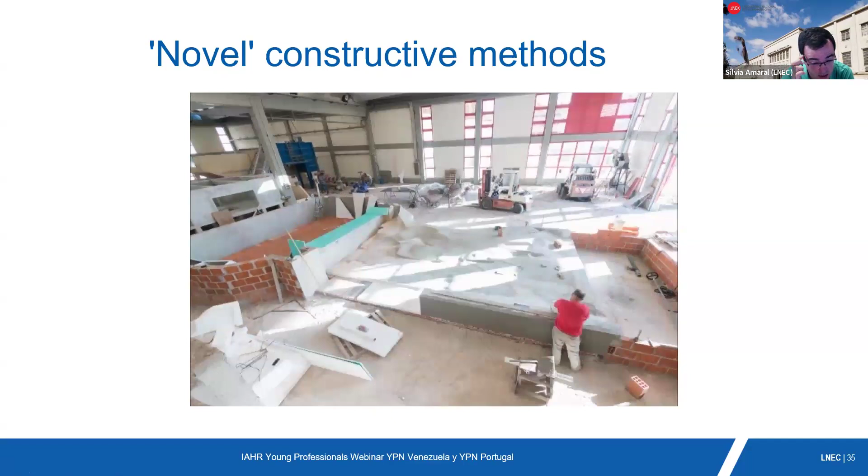Here is a small video, a small time lapse of how we built a model like this. We start to make the reservoir, putting some styrofoam plates, automatically cut to represent the terrain, some cement paste also to waterproof the terrain and join all the pieces together, putting some PVC pieces to make the shape of, in this case, a stilling basin, and finalizing it with small pieces of a fish passage here at the bottom left. The main object of the study is produced by automatic cutting machines and 3D printing.

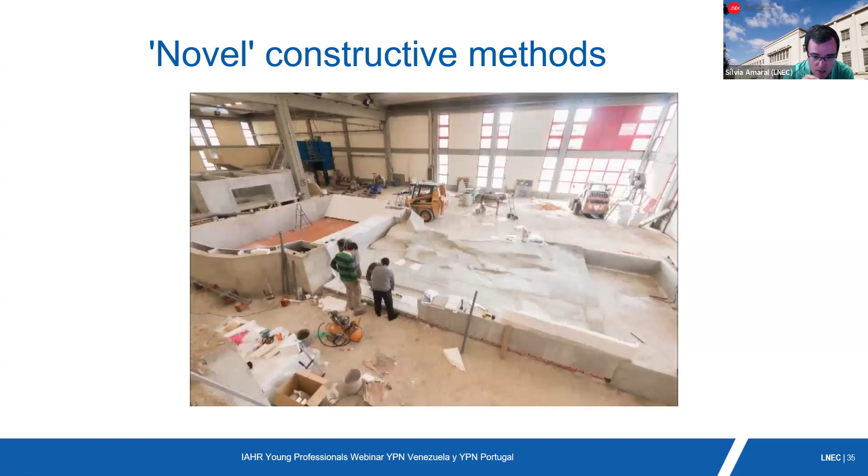Almost finished, and then water starts to fill the reservoir, and in the next seconds we have water in the model. Of course, with some leakage, because it is a laboratory facility and we have to deal with these small things all the time.

Now the evolution of the technologies we use in data acquisition. We acquire lots of variables. We measure lots of things, but let's focus on two of them. A 3D representation of the scour of dikes and dam breaks.

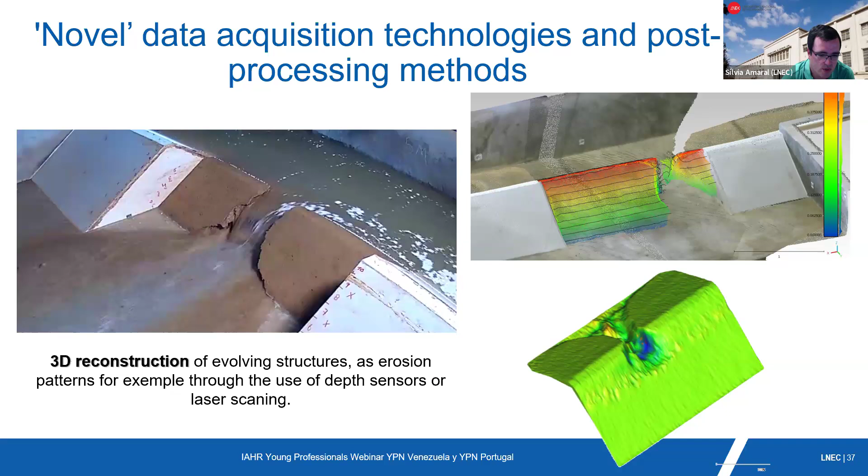We use photogrammetry, cameras with depth sensors and laser scanning, and the characterization of the velocity fields in the same type of structures. We use high velocity cameras, and we perform particle image velocimetry and particle tracking velocimetry.

Now let's pass to Sílvia again. So we are almost reaching the end.

So some final remarks about the importance of physical modeling of large hydraulic structures. Just to finish, I have to say that, as I referred at the beginning, physical modeling started in the early 20th century. At that early stage, the focus was essentially on design verification, performed with some basic methods, and only basic hydraulic analysis was possible at that time because of the limited resources, and the precision was really restricted.

Today, we can affirm that physical modeling has indeed evolved significantly, mostly because of the novel construction methods, the novel materials, the equipment, the novel technologies and methods that we now have for our physical tests, but also because we are able to combine physical modeling and numerical modeling to do an integrated analysis of the flow behavior on hydraulic structures.

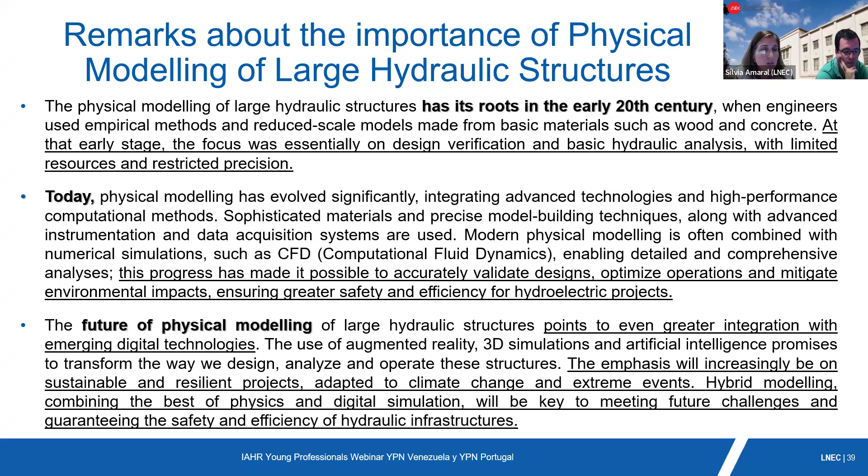So in the future, we believe that large hydraulic structures will point to an even greater integration with emerging digital technologies, and the emphasis will increasingly be on sustainable and resilient projects. Climate change will be at the top of the concerns, along with the adequate response to extreme events. And integrated modeling, combining the best of physical modeling techniques with the best of numerical simulations with CFD, will be the key to meet future challenges and assure the safety and efficiency of these large hydraulic structures.

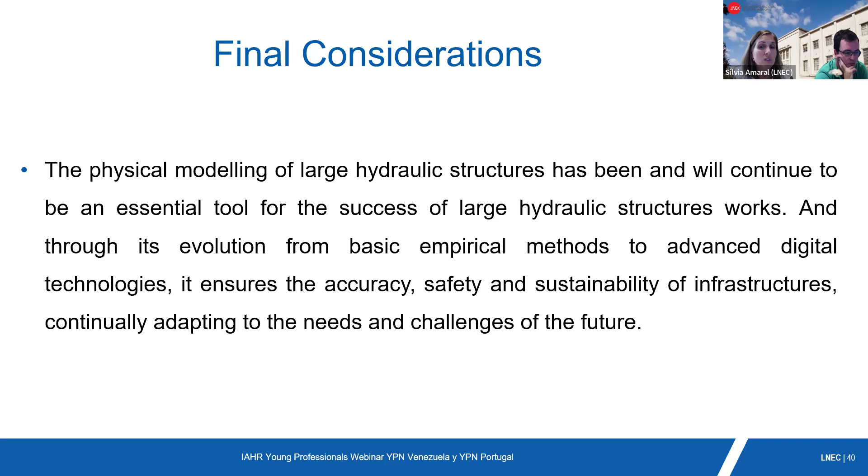So from our point of view, physical modeling of these structures has been and will for sure continue to be essential for the success of large hydraulic structures works, and through its evolution from the basic empirical knowledge of the early 20th century to current advanced digital technologies, it will ensure accuracy, safety, and sustainability of infrastructures, and continually adapt to the needs and challenges of the future.